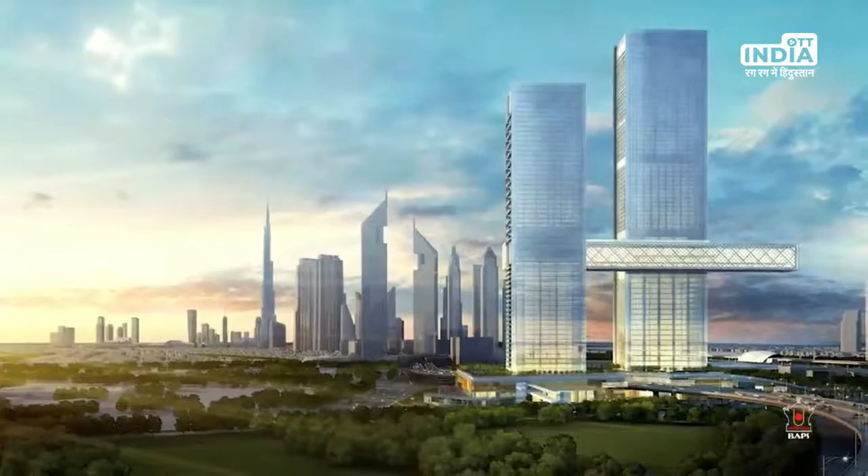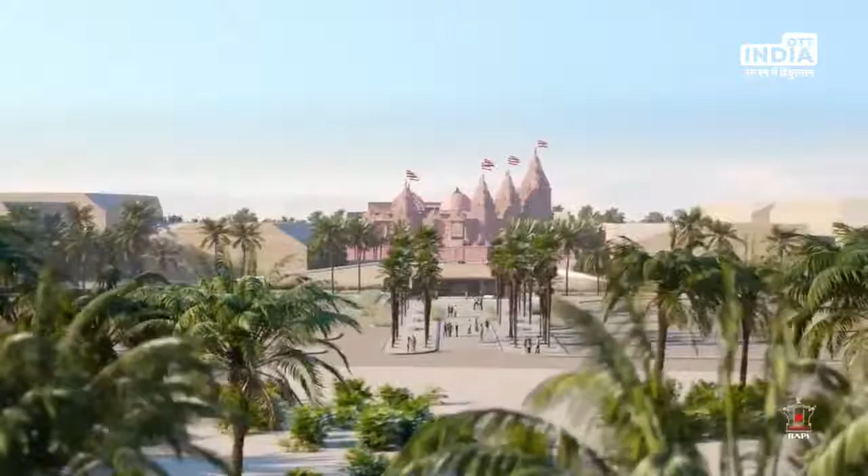The United Arab Emirates is known internationally as a land of landmarks, from the towering Burj Khalifa to the world's largest cantilever building, from cultural landmarks like the Sheikh Zayed Grand Mosque to the majestic presidential palace. The BAPS Hindu Mandir is also destined to be an iconic and historic landmark.

The Mandir has countless stories to tell, from its inception and location to the unique fusion of ancient architecture and modern technology. Today, let's explore the foundation story, the story of a spiritual structure.

The BAPS Hindu Mandir in Abu Dhabi will represent the Nagara style of Hindu architecture according to the Shilpa Shastras. It will include 7 shikhars that will enshrine deities from the length and breadth of India. However, incorporating this ancient design with 21st century construction is a task in and of itself, and its story begins with a gift of land.

In 2017, the Crown Prince of Abu Dhabi granted BAPS 13.5 acres of land in Abu Mureikhah. The story of the land in itself is incredible. Initially, His Highness the Crown Prince of Abu Dhabi allotted us 2.5 acres of land in Al Watba, on the road from Abu Dhabi to Al Ain. Then, without us even asking, they increased it to 5 acres.

Then suddenly we got instructions to keep everything on hold. After a few months, we were suddenly informed that a special parcel of land had been allotted to us, 13.5 acres on the arterial road of Abu Dhabi to Dubai. Imagine, on a land we never asked for, never selected, and when we were moved almost 3 times, that land had a thick strata of sandstone, so strong and so hard that it was just 1 meter below the surface.

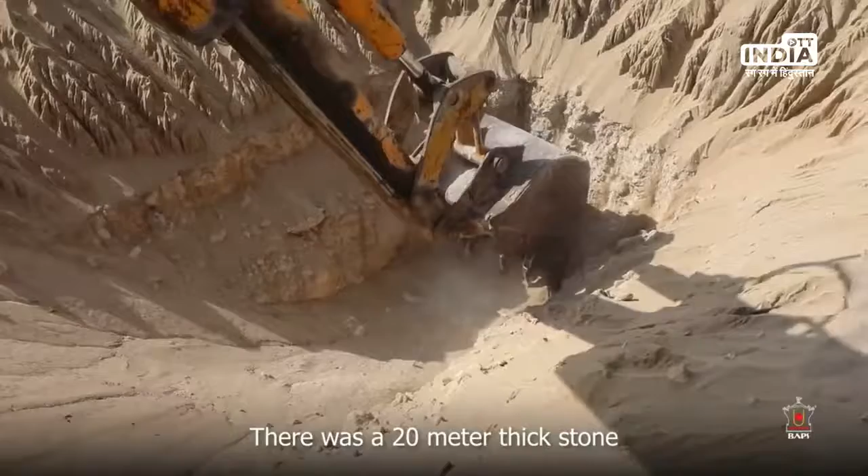When the land was first received, we had already made the original concept designs. To see if that plan would be feasible, we did a geotechnical survey, and what we found was surprising. There was a 20-meter thick stone in the middle of the plot where the mandir was expected to be built. We found competent bedrock very close to the existing ground level.

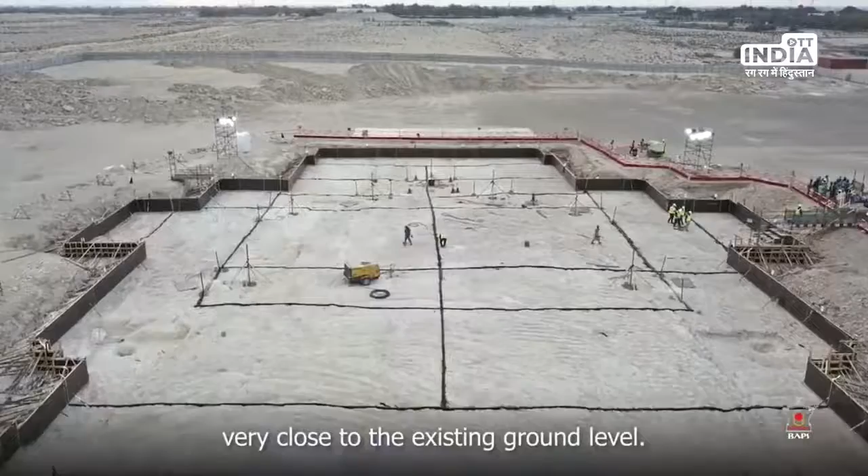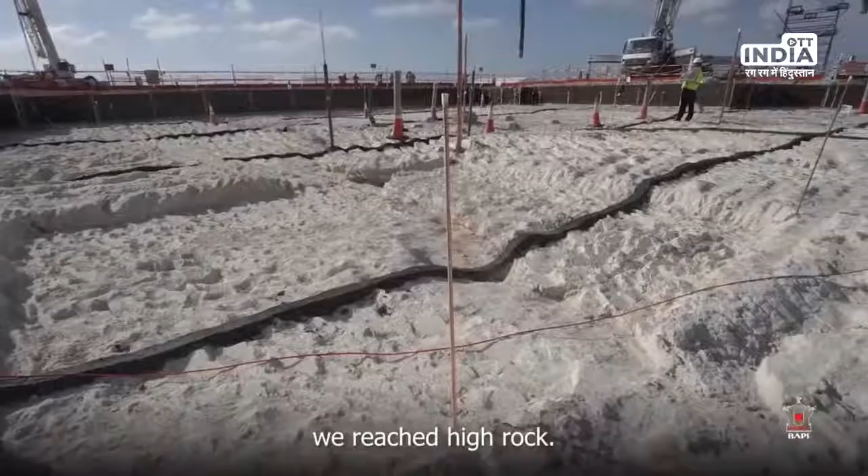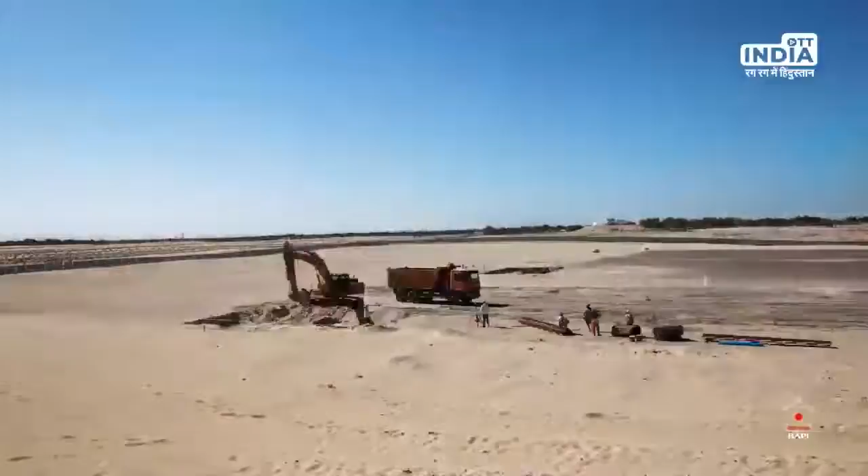When we started this project, we were really surprised, because before reaching the excavation level itself, we reached hard rock. I feel this is the first time in the GCC. More than 15 years I have been working in the GCC, and this is the first time I find such a good foundation within such a limit. Once the ground was ready, it was time to start the foundation. The intent of giving the mandir longevity also reduced its environmental impact during construction.

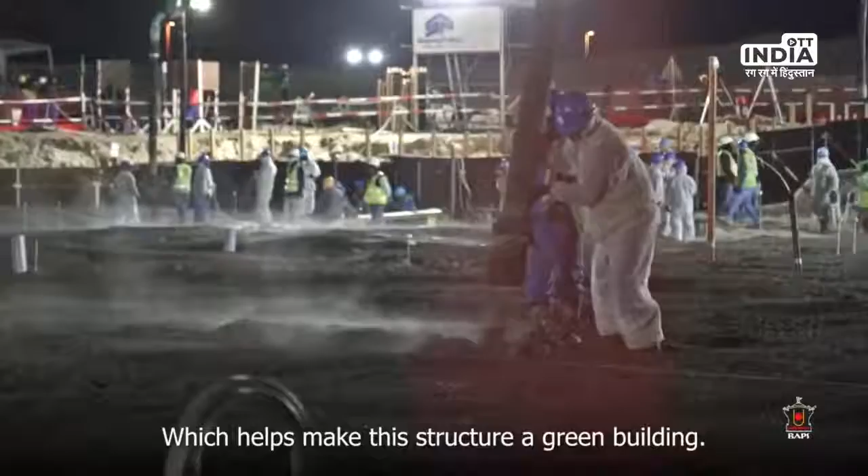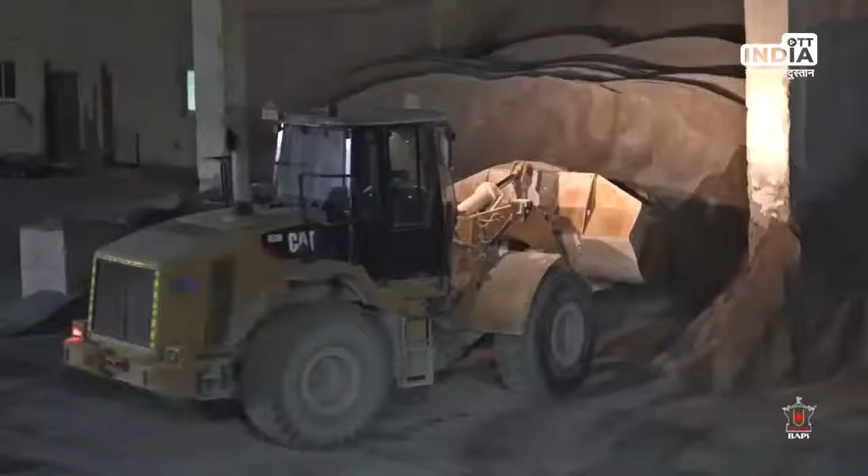The fly ash for the structure had to be of a specific grade. After thorough testing, suppliers Adani Power Plant in Gujarat and Jebel Ali Power Plant in Dubai were able to provide the material that fulfilled the mandir's requirements. The total structure of the temple will be using 12,000 metric tons of fly ash, of which we have already used 2,000 metric tons.

With the help of local merchants and volunteers like Rajiv ji and others, we have been able to find the right grade and quantity for the mandir. However, finding the fly ash was only part of the puzzle. This quantity of fly ash is not generally used in the UAE, and so we had to find someone who would be willing to support us by mixing the batches as our engineers needed. That's where we found Extra Mix.

We at Extra Mix are very happy to be part of this prestigious historical project, and we are very delighted and thankful to the authority for being a part of this project. The mandir's designers felt the responsibility to create a building that would last 1,000 years, and that began with the design of a 1,000-year foundation.

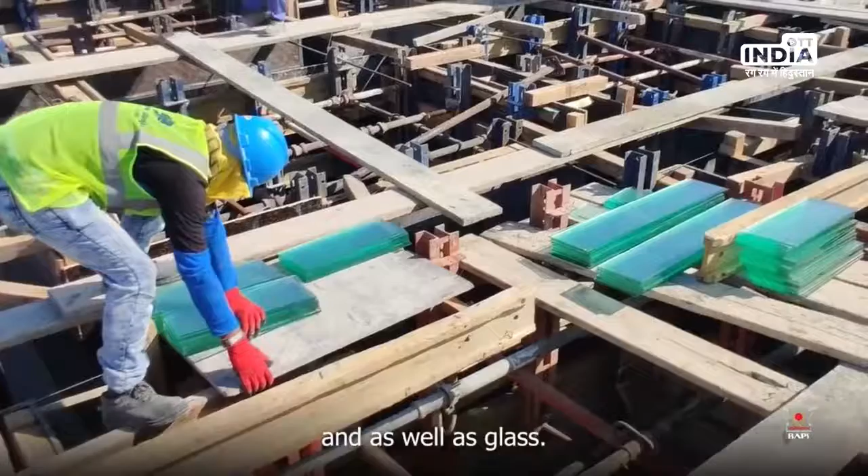We have used a very unique technology, Indian technology, that uses basic materials like bamboo sticks as well as glass. Glass in the vertical direction, so that cracks do not develop in the transverse direction. Because concrete only has compressive strength. It doesn't have tensile strength.

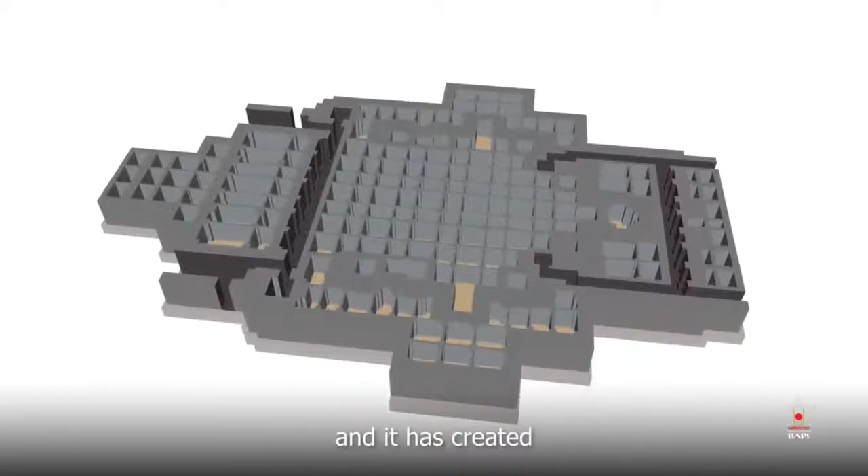So wherever the cracks are developing, these bamboo sticks and glass provide tensile strength to the concrete. In this foundation, in general, we can categorize it into 3 stages. The first stage is the bottom raft, which is on average 1 meter in height, and the top is half a meter in height. In between, we have the concrete walls, which we have cast in a grid pattern, and it has created around 170 boxes within this foundation.

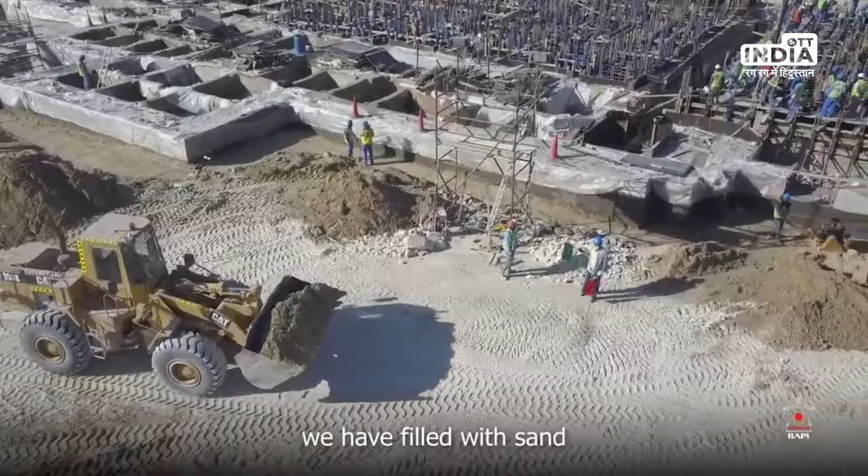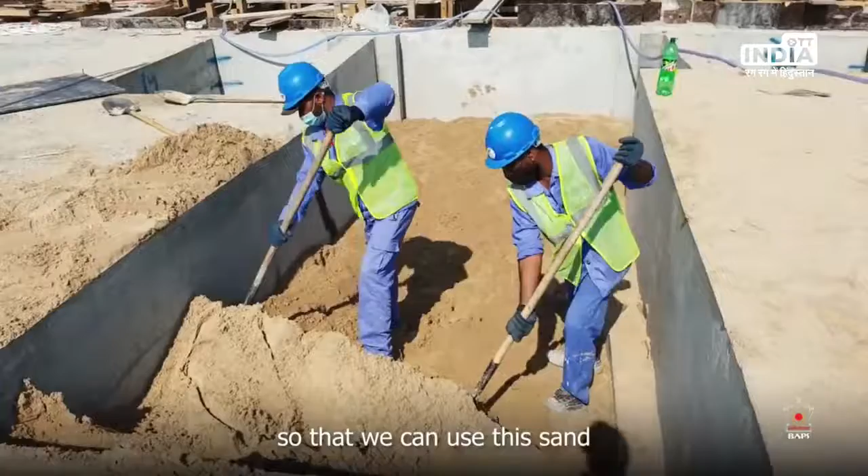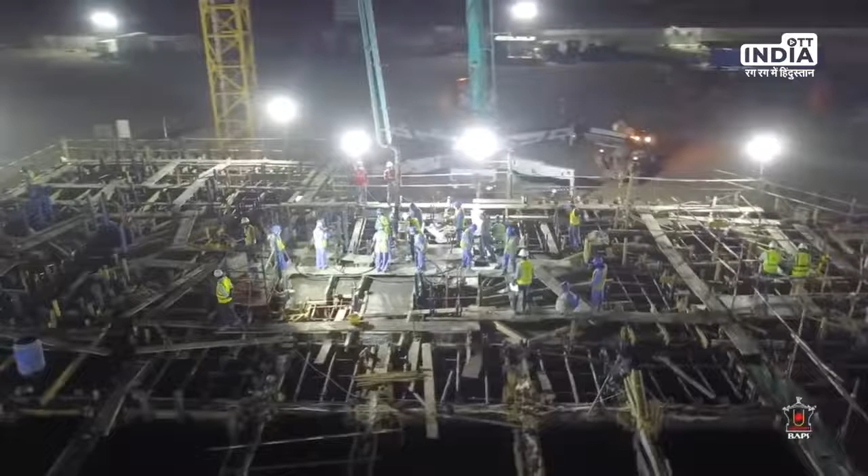Now, these boxes we have filled with sand, which is readily available on site. The good thing about this sand is, when we tested it in the laboratory, we found that this sand has no sulfate and chloride in it, so we can use this sand directly as a structural fill material in this foundation.

While the team on the site was working away executing the box foundation, the design team came across a new challenge. The government-approved structural reviewer requested the structural design submission to be made in ETABS modeling software. This software does well with standard buildings, but is not well equipped to handle a unique stone structure with an abundance of intricate carvings and surfaces. This temple has been designed by the ancient science of building temples called Shilpa Shastra. It itself is a complete science.

But when they submitted this drawing for our review and approval as a Socotec, we had to make sure that the submitted design of this temple is in compliance with the authority requirements and the applicable codes and standards of this region. For this purpose, the whole BAPS Hindu Mandir team and their consultant had to build a 3D model of this temple, which is very complex because of the complex geometry of the temple and the material used in this temple.

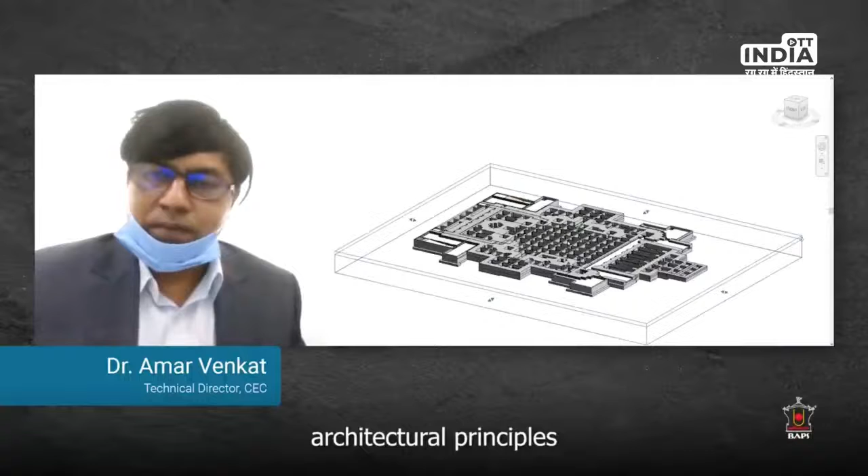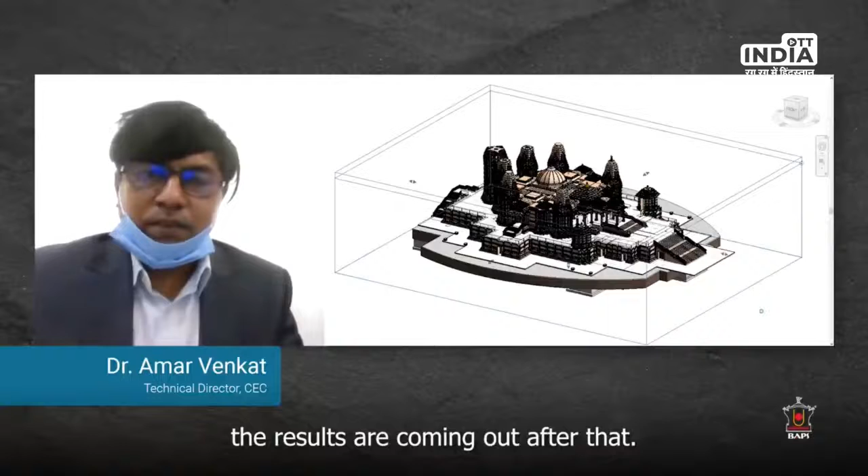We know our construction techniques and architectural principles and the ancient Shastra. We know it is right. We know it works. But translating that into modern era theories is what was intriguing for us. It's not like we draw and give it to the computer and the computer does everything. It's like solving so many mathematical equations and the results come out after that. So we ended up doing a lot of iterations. Frankly speaking, I was skeptical when we started the exercise. It was a revelation as we started modeling.

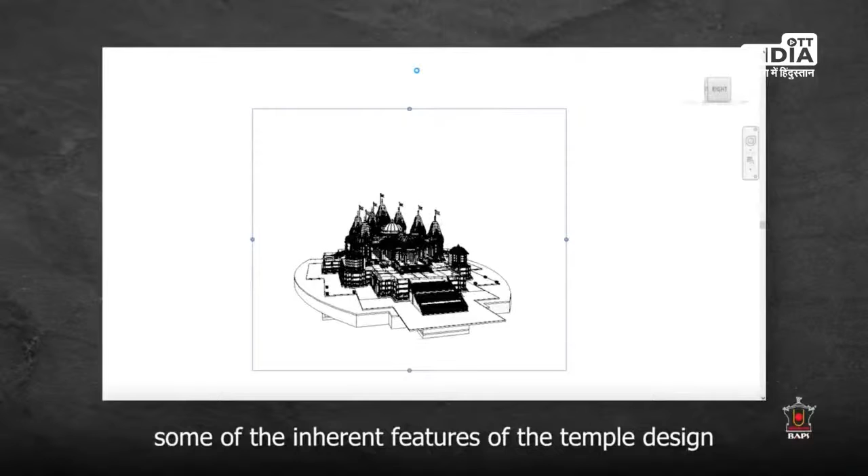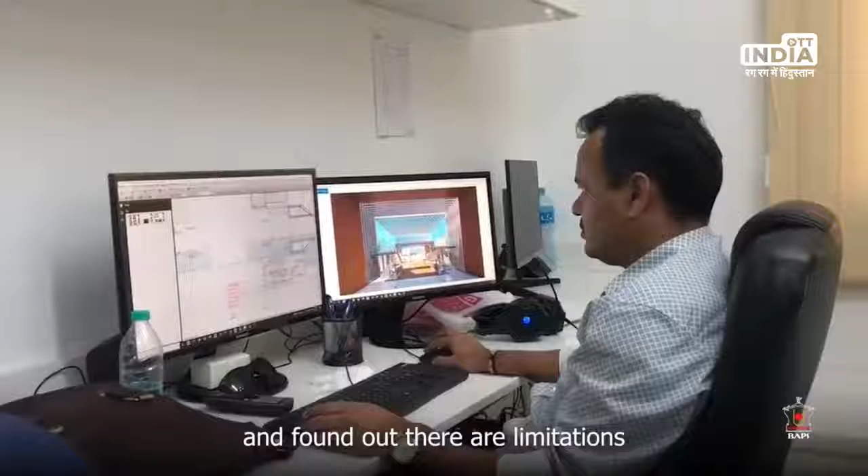See, modern science is more of a proof. As we moved on, we found out that some of the inherent features of the temple design, one being the way in which the walls have been arranged, were helping us a lot. We developed the computer mathematical model for the design to comply with the current codes and regulations in Abu Dhabi and UAE. With almost all the software we used, we found there are limitations of current knowledge and software, that it cannot model certain shapes and joints for the stone temple.

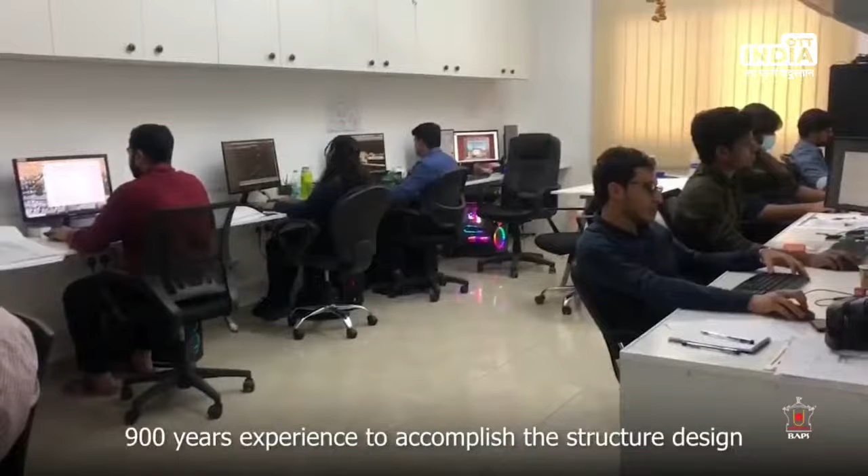We utilized an FEM model to prove this design and spent more than 2 years to fulfill the authority requirements. Overall, we embedded almost 900 years of experience to accomplish the structural design and the foundation design. Certain software like ETABS and SAP was selected by the authority, which has limitations to design the structure. We tried to match the behavior of the structure rather than only the geometry. That is more important for us under earthquake conditions. That was the biggest challenge.

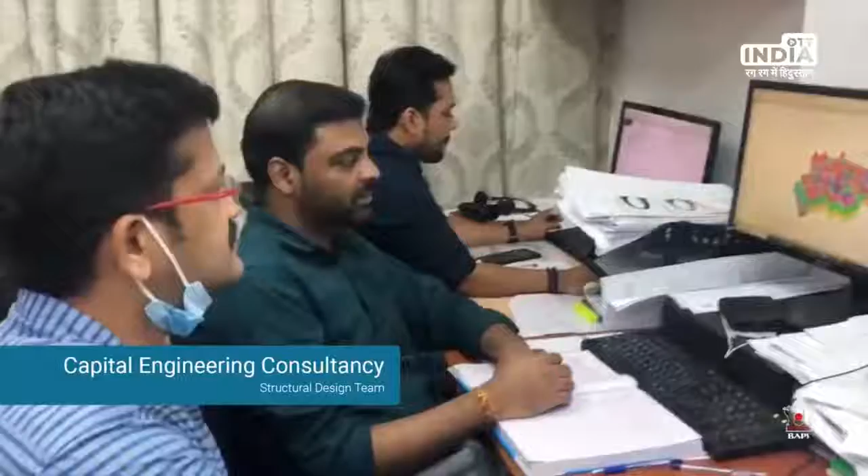So we had to use multiple software for different shapes of elements and combine them together, and the final output was analyzed with the ETABS model to fulfill the authority requirement. In the end, with a total of 30 professionals from 10 countries and over 5,000 man-hours, a model was made in ETABS with the support of 3 additional softwares. It was the first time in history that a traditional Hindu mandir was fully digitally modeled and then put through such extreme seismic simulations. Fortunately, for the millions of people who will visit this mandir every year, it passed with flying colors.

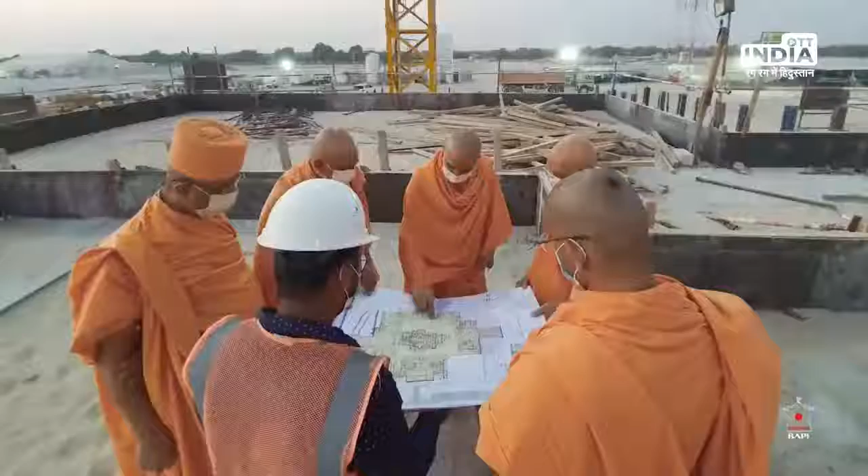But for the design team, accomplishing a historic task was not enough. They wanted to leave a legacy of knowledge for the future. This will be the first temple in the world where instruments embedded during construction will predict the behavior and back-calculate physical parameters. That will generate a new theory for structural design, especially in stone structures. 300 sensors are continuously emitting live data to engineers and researchers at this very moment, and will continue to do so for decades to come. This will ratify the design, but also serve as an early detection system for structural anomalies. These sensors are already inspiring groundbreaking research.

The temple has many sensors, like displacement sensors and load cells beneath the structural columns, so we can understand whether construction is going well and whether foundation performance is good during construction. If any issue is observed during construction, we can adjust the construction itself. So by combining modern technology and historic knowledge, we can find a solution for the future. Integrating our history and knowledge from ancient times with modern technology will bring us a new future.

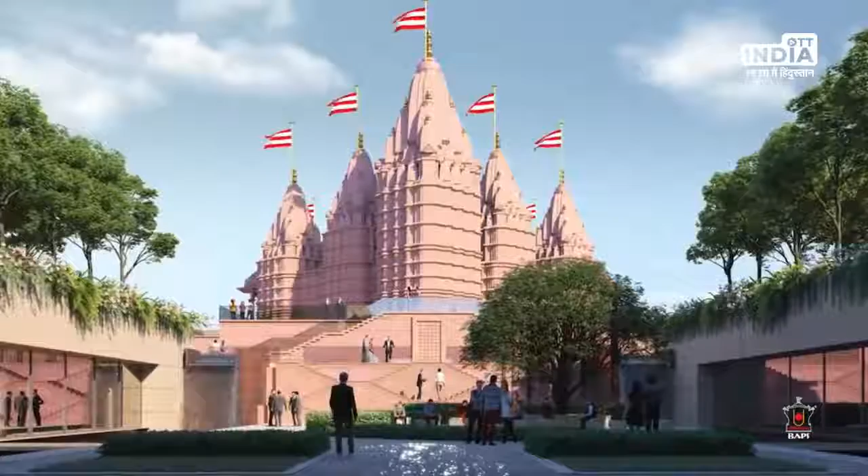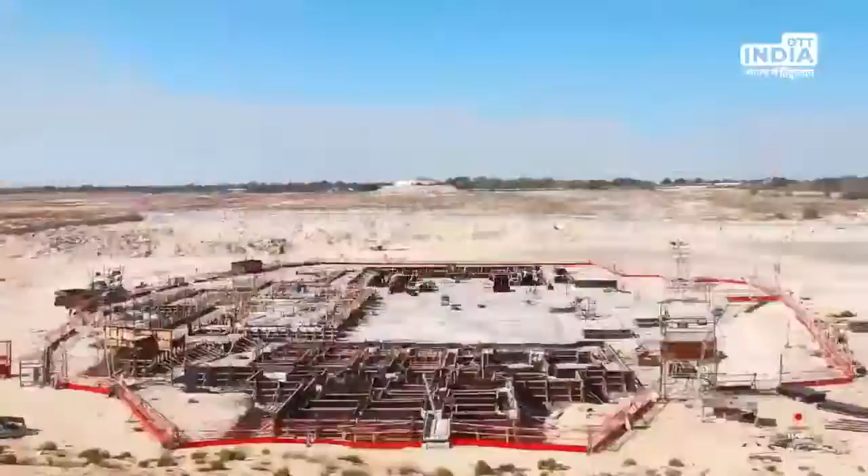There is a saying, things invisible are more important than things visible. Though the foundations of this mandir will remain invisible, they will uphold the visible mandir for generations to come. This is the foundation story of a spiritual structure.